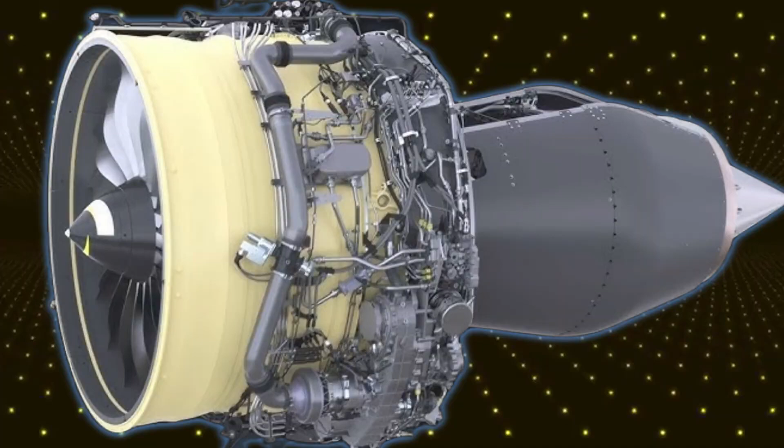Fast forward to 2024, and the MC-21-310, powered by the PD-14, is now poised to enter commercial service. This engine, symbolizing years of engineering, national ambition, and a commitment to technological independence, now stands ready to redefine Russian aviation in the global market.

The late 2000s were a transformative time for Russian civil aviation, with the launch of the SSJ-100 signaling a revival. Yet, this wasn't enough. The ultimate goal was the MC-21, a modern, medium-haul jet designed to break into the market dominated by Western giants like the Boeing 737 and Airbus A320. This would require more than just innovative design and passenger comfort. The MC-21 needed a competitive engine to be viable globally.

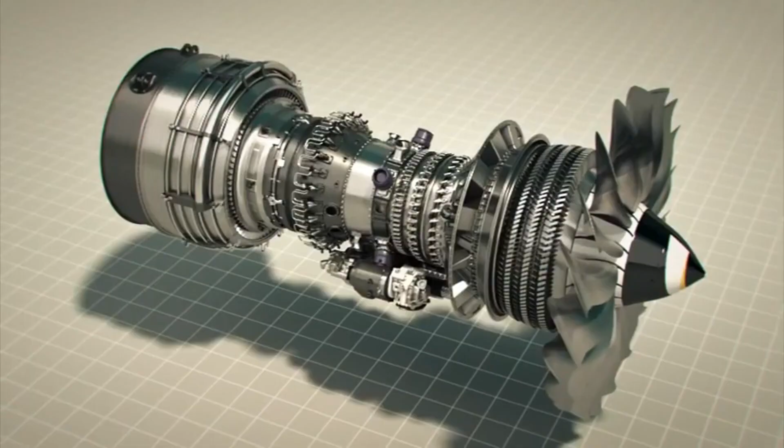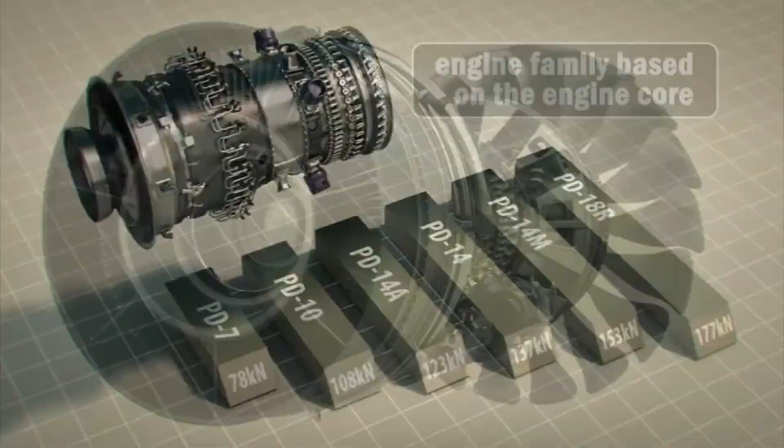While initially it seemed more straightforward to rely on foreign engines, geopolitical realities and a push for autonomy led to the decision to develop a domestic option. The United Engine Corporation took on this challenge, setting a goal to build an engine that wasn't merely functional, but competitive, efficient, and symbolic of Russia's engineering capabilities. The result would be the PD-14, an engine not only tailored to the MC-21, but one that could lead to a new family of engines, signaling Russia's commitment to self-reliance and technological prowess.

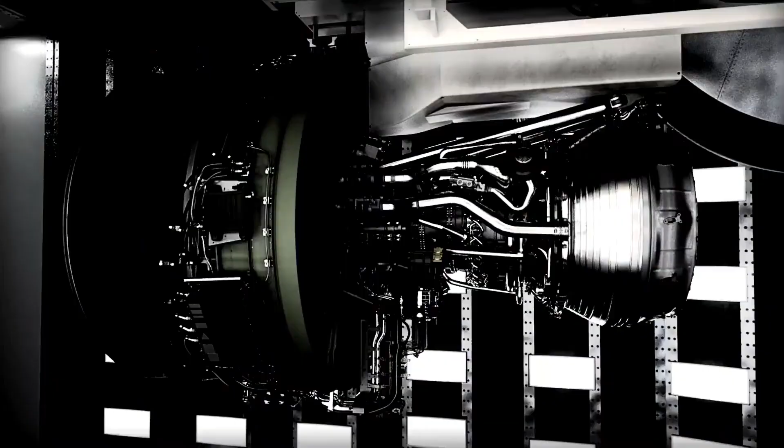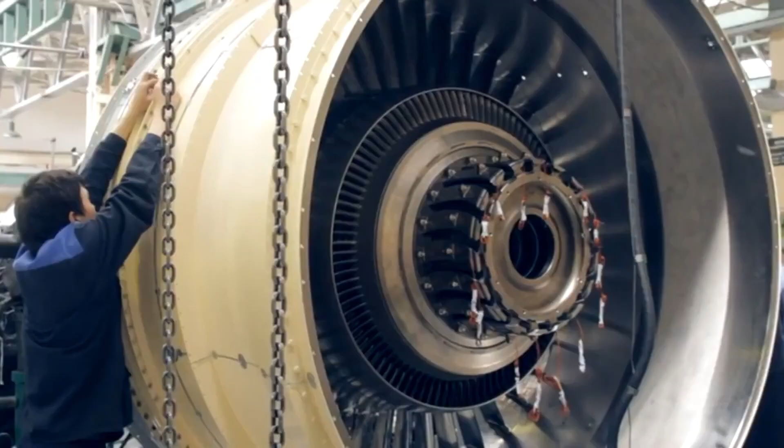Creating the PD-14 meant standing up against engines honed over decades by global leaders. Companies like Rolls-Royce, Pratt & Whitney, and General Electric had spent decades fine-tuning technologies and advancing materials science, resulting in some of the most sophisticated engines in history. Russian engineers viewed this challenge as an opportunity to leapfrog with a fresh perspective. Their goal was to build something dependable, innovative, and robust, without risking untested technologies.

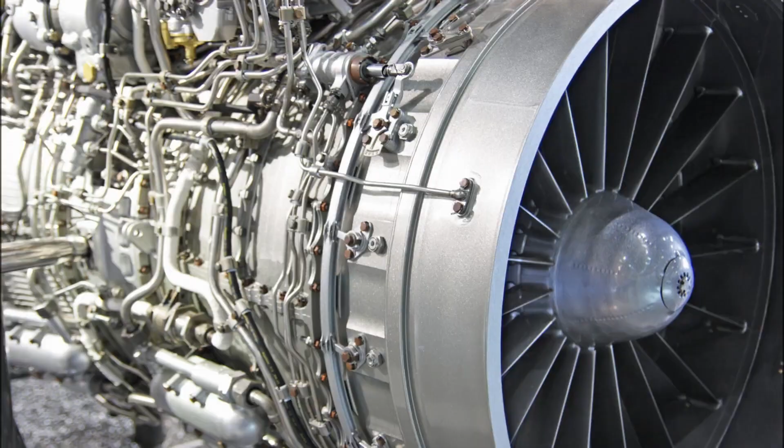They decided to draw on a mix of established methods and cutting-edge solutions in areas such as materials and aerodynamics. Through strategic decisions, the engineers balanced the PD-14's complexity with reliability, opting for materials that would ensure durability even as the engine reached high-performance metrics. Russia's aviation engineers were acutely aware that this wasn't just about producing an engine. It was about staking their claim in a market long dominated by a few key players.

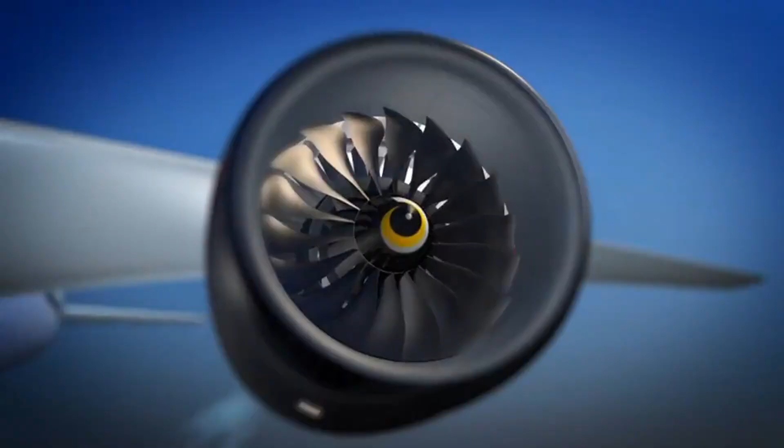Building the PD-14 required more than technical know-how. It demanded a sweeping modernization of Russia's aviation industry. Facilities that had long relied on older, less efficient methods were suddenly tasked with producing advanced components. To meet the demands, an overhaul began across multiple sectors, not only in terms of machinery, but also workforce. Skilled workers underwent extensive training, learning to handle the complexities of producing high-tech engine parts.

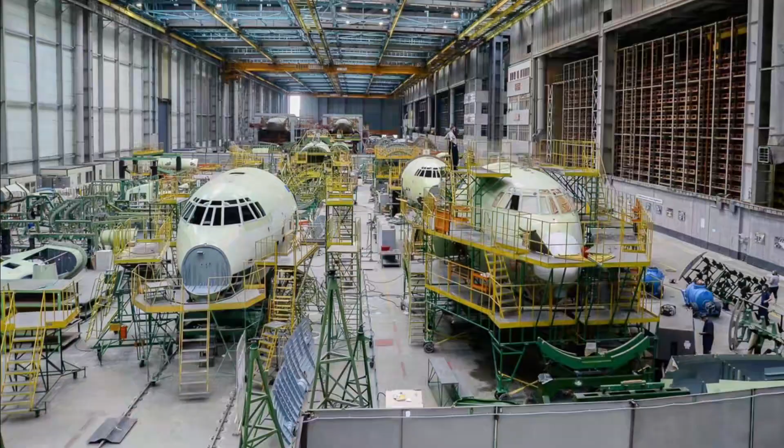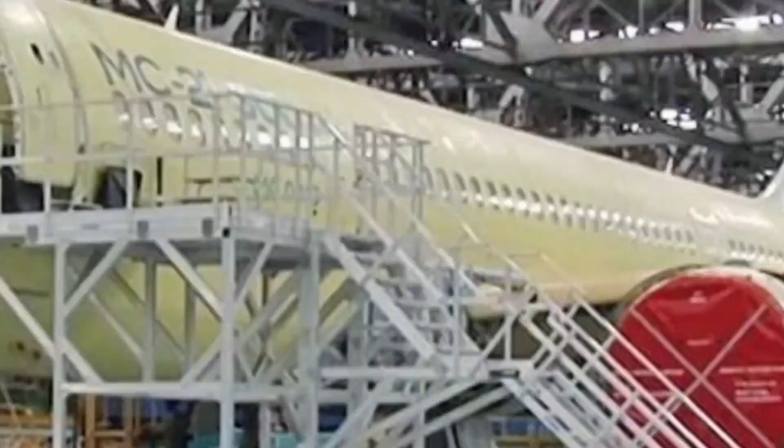The UEC Aviadvigatel, the hub of this initiative, collaborated with Russian universities, aerospace research centers, and large-scale manufacturing facilities to ensure that every aspect of production met international standards. This collaboration created a feedback loop where innovation at one site supported advancements elsewhere, forging an interconnected, efficient ecosystem. By the end of this transformation, Russia's aviation manufacturing had not only caught up, but was now prepared to lead, with facilities capable of supporting current and future generations of engines.

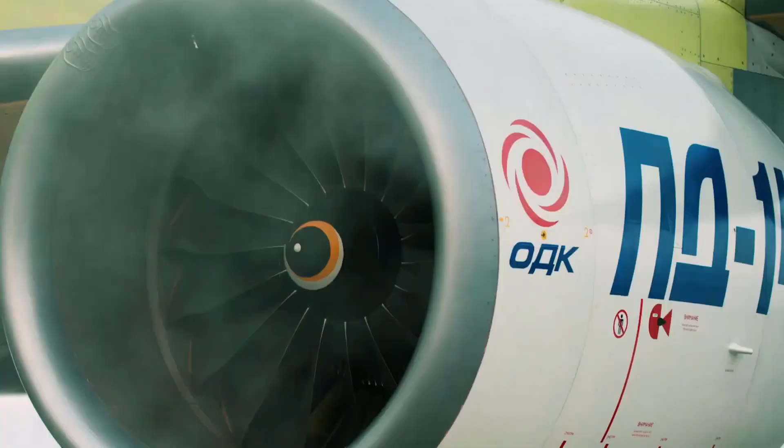With the prototypes ready, the PD-14 embarked on a series of rigorous tests to prove its capabilities. This wasn't a simple process. Ground tests began in 2012, examining every aspect of the engine's structure and resilience. Over time, additional prototypes were constructed, each representing an iteration of improvements based on prior tests. In 2015, the PD-14 made its first test flight under the wing of an IL-76 aircraft, a significant milestone in its journey. This stage involved subjecting the engine to varied flight conditions, ensuring it could handle everything from cold temperatures to high altitudes and rapid power shifts.

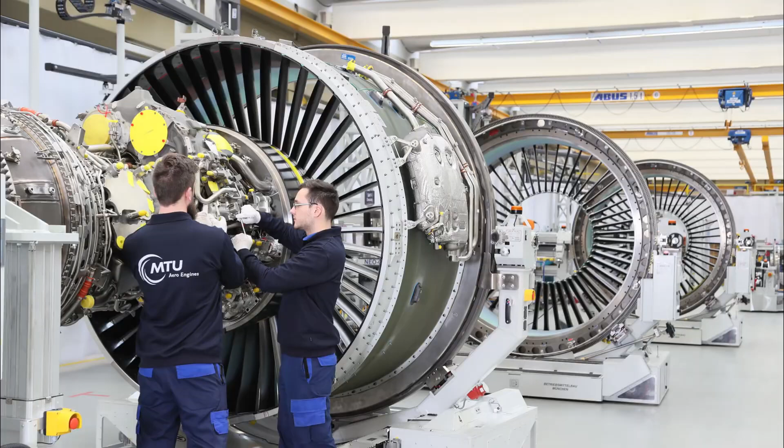Over 3 years of testing, adjustments were made to refine the engine's performance, ultimately culminating in its certification by Russian authorities in 2018. Yet, this certification marked the beginning, not the end. The engine continued to undergo further validation to meet international standards. By 2021, the PD-14 was ready for its public debut at the Dubai Air Show, symbolizing a new era of competitive Russian engineering on the world stage.

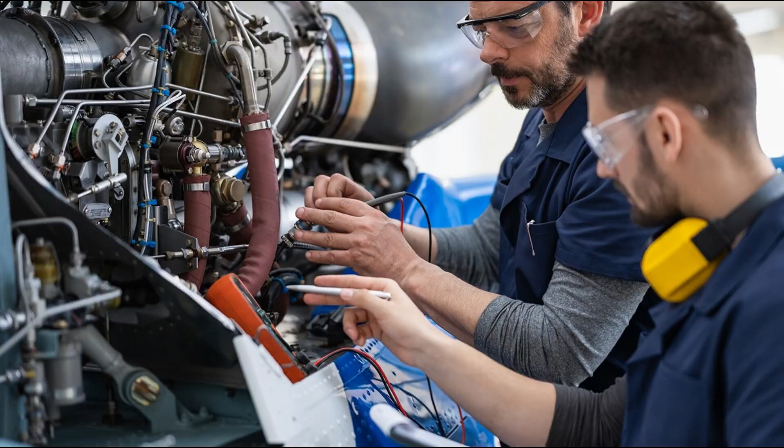One of the most grueling tests for the PD-14 was exposure to volcanic ash, a simulation meant to protect engines from events like the 2010 Icelandic eruption that grounded flights across Europe. While volcanic eruptions are rare, the ash particles are hazardous to jet engines, leading to significant wear and potential failure if inhaled during flight. Russian engineers recognized this risk and decided to put the PD-14 through an ash endurance test, using real volcanic ash sourced from the Kamchatka region.

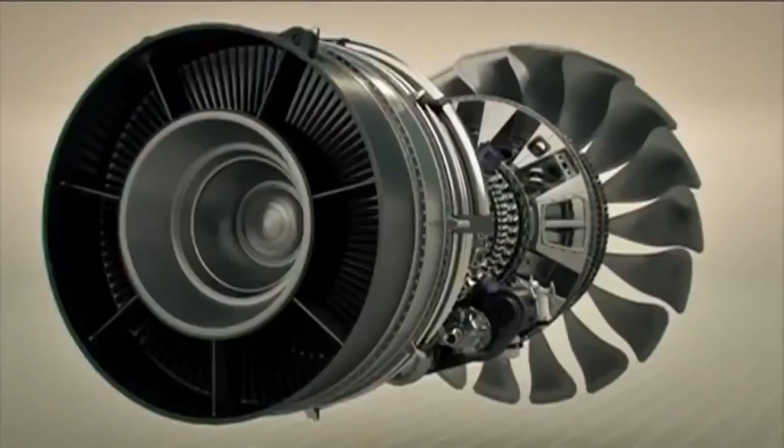This wasn't merely about surviving the ash clouds, but ensuring continued performance and reliability in such conditions. The tests exposed the engine to dense ash at high speeds, simulating conditions an aircraft might encounter. By enduring this trial, the PD-14 demonstrated its resilience and durability, standing out among engines that rarely face such harsh testing. These preparations place the PD-14 ahead of its class in durability, making it one of the most resilient engines ready for both everyday and extreme conditions.

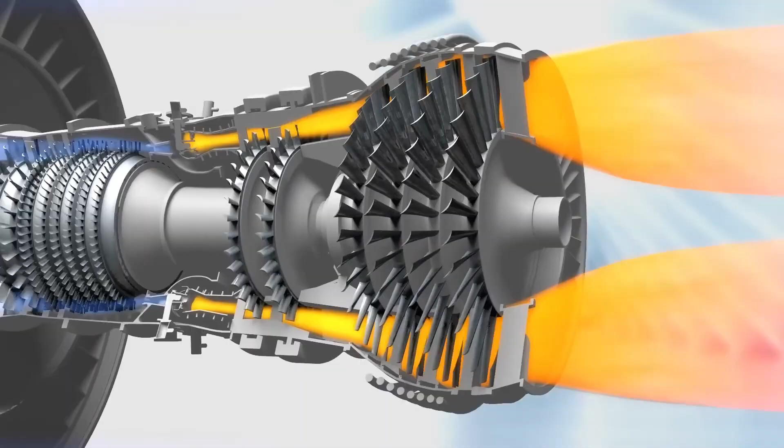The PD-14's core design embodies a balance of efficiency, power, and durability. This fifth-generation dual-bypass turbojet engine uses two distinct air circuits to generate thrust: the core circuit, where air is compressed, ignited, and expelled, and the bypass, which sends air through a large fan to maximize thrust. Within the core, 11 compression stages raise the air pressure nearly 40 times, transforming a steady airflow into a powerful stream. This compressed air, now heated by the combustion process, reaches temperatures nearing 2,000 degrees Celsius, requiring advanced engineering to avoid overheating. Special ceramic coatings and meticulously designed cooling channels protect internal components, ensuring durability under high-stress, high-heat conditions.

The PD-14's robust design allows it to maintain a steady balance between power output and energy consumption, delivering reliable performance without sacrificing longevity. Each component, from the compressor to the turbine, is carefully crafted to withstand the rigorous demands of modern flight, underscoring the PD-14's role as a high-performance yet sustainable engine.

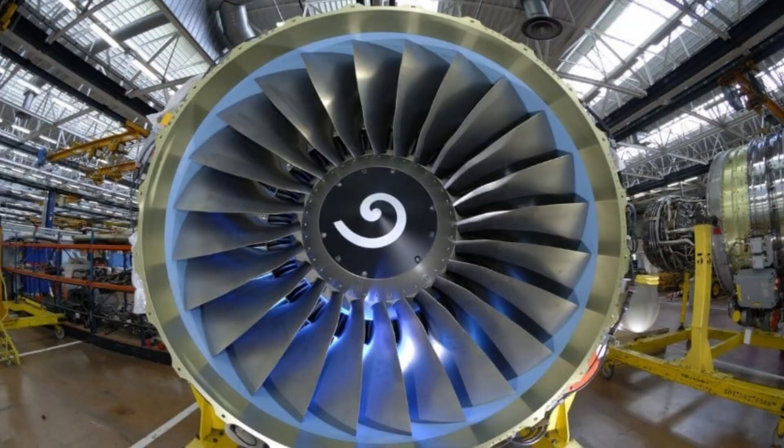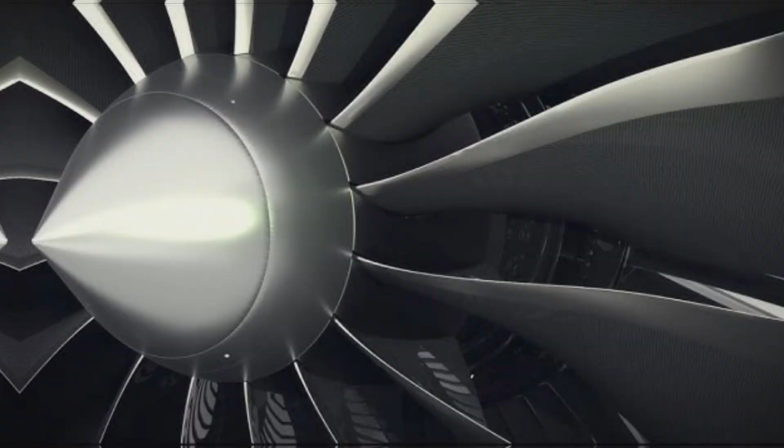The fan, a signature feature of the PD-14, is crafted from hollow titanium blades, a choice that combines strength with weight reduction, making the engine more efficient without sacrificing durability. Competing engines often utilize composite materials, but Russia's titanium blades offer a cost-effective, reliable alternative. These hollow titanium blades create a unique balance, adding enough thrust through the bypass to make the engine competitive in fuel efficiency without the high production costs associated with composites.

The fan's design, paired with the PD-14's bypass ratio of 8.5:1, optimizes airflow, enhancing both thrust and fuel economy. This bypass ratio means that more air flows around the engine core than through it, creating a quieter, more fuel-efficient flight. Russian engineers saw this as an optimal compromise, allowing the PD-14 to deliver consistent performance while keeping costs manageable. This approach showcases a commitment to not just performance, but also operational economy, ensuring that the PD-14 is both a powerful and financially viable choice.

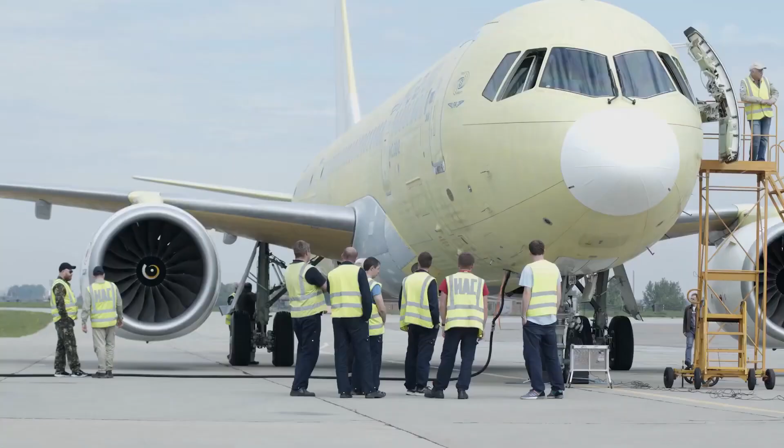Environmental responsibility was a driving factor in the PD-14's development. Traditional Russian engines were powerful but fuel-intensive, yet the PD-14 manages to improve on these foundations. It offers a 12 to 16% boost in fuel efficiency compared to its predecessors, translating to fewer emissions and cost savings for operators. With emissions reduced by approximately 30%, the PD-14 supports global aviation's push towards sustainability, meeting or exceeding modern regulatory standards. This efficiency is partially due to its bypass design, which ensures consistent performance across various flight speeds.

While environmental factors played a critical role, the PD-14 also excels in traditional performance metrics, balancing fuel economy with power output. This environmentally friendly design makes it a forward-thinking engine, well-suited to meet the aviation industry's shifting standards. As airlines face increased pressure to reduce carbon footprints, the PD-14 offers a valuable solution that combines environmental responsibility with operational effectiveness.

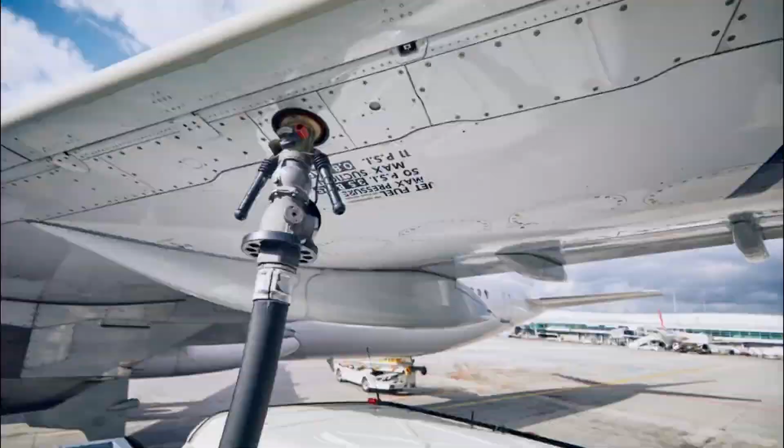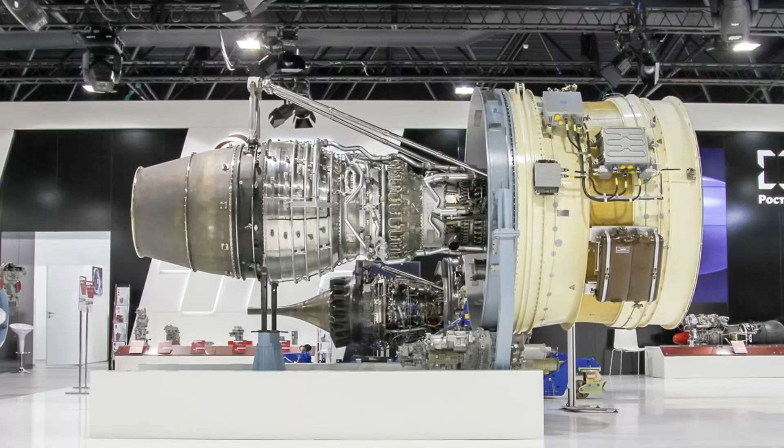The PD-14 incorporates a sophisticated web of electronics, handling fuel regulation, temperature management, and airflow adjustment in real time. Unlike older engines that depended on hydraulics, the PD-14's operations are largely automated, overseen by electronic systems designed by UEC Star. This evolution significantly reduces mechanical wear, improving reliability while decreasing maintenance needs.

By centralizing control into an advanced electronic brain, the PD-14 adapts quickly to shifts in flight conditions, automatically fine-tuning performance to match the demands of each phase of flight. Additionally, these electronics monitor engine health, alerting maintenance crews of any issues before they escalate.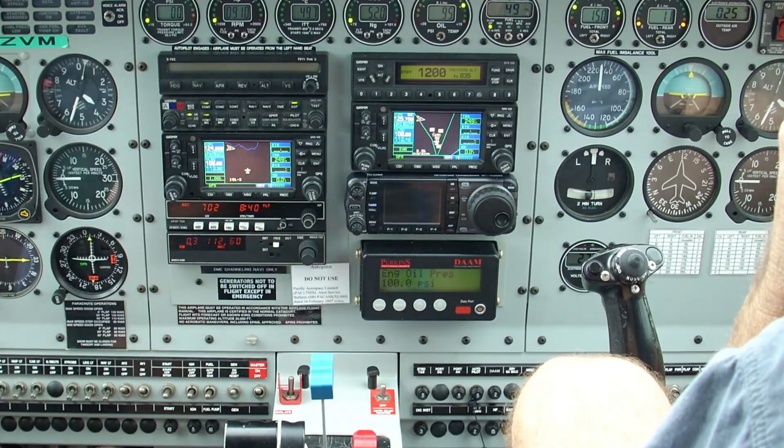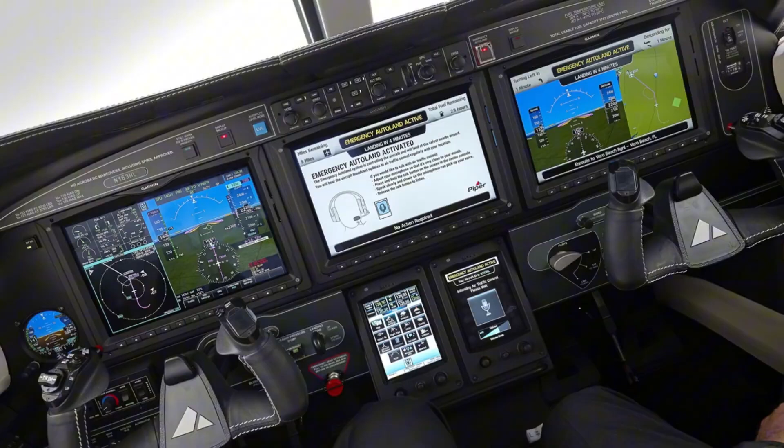This integration of smart controls makes the PD-14 a highly responsive engine, capable of managing various parameters with precision. The streamlined automation not only boosts efficiency, but provides peace of mind for operators who benefit from increased reliability and fewer unexpected repairs, ensuring smooth, cost-effective, and reliable service.

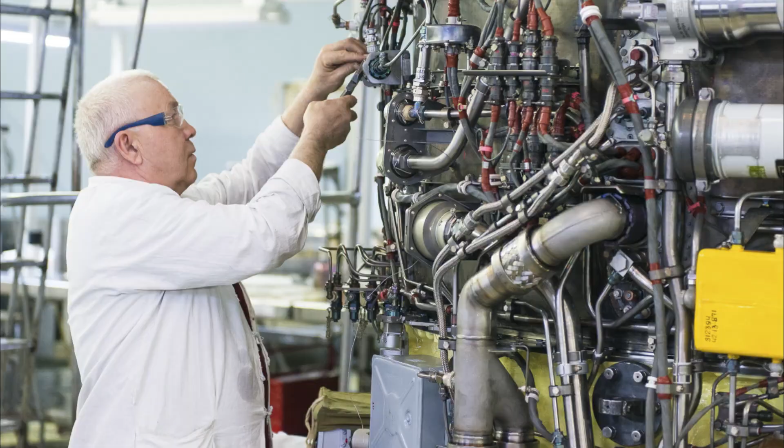Understanding that engine support is just as crucial as design, United Engine Corporation began creating a comprehensive maintenance network well before the PD-14 was widely deployed. From repair facilities and spare part logistics to dedicated training centers, UEC ensured a robust support system to keep the PD-14 in peak condition throughout its service life.

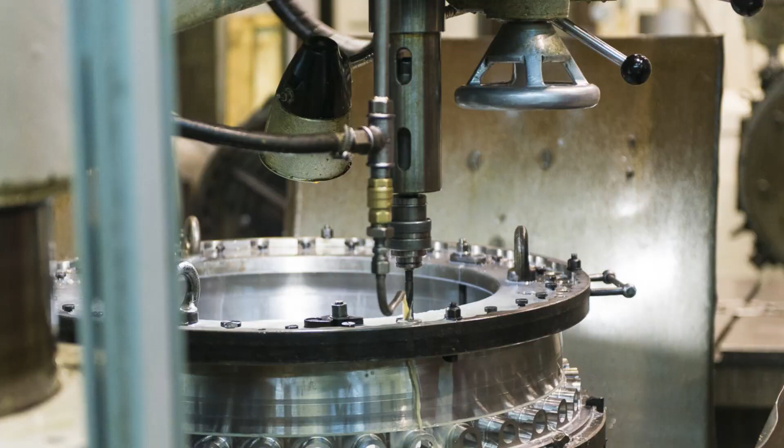Strategic centers were established across Russia and in international markets, making it easy to access parts and technical expertise wherever the engine is in use. This infrastructure means that operators can rely on rapid turnaround for repairs, minimal downtime, and consistent maintenance quality.

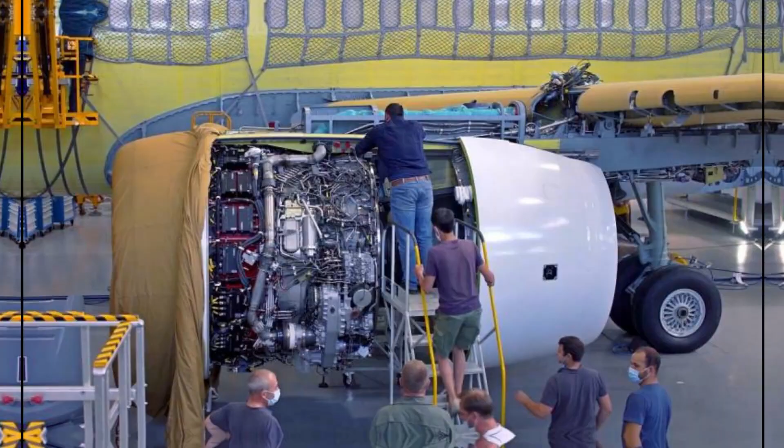UEC's commitment to post-sales support ensures that the PD-14 is not only well-built but well-maintained, securing its long-term reliability and appeal. This extensive network allows Russian aviation to step confidently onto the world stage, promising both high-quality performance and unmatched support, ensuring the PD-14's success as a reliable option for airlines around the globe.

The PD-14 is more than a standalone engine. It's the first in a family of engines designed to support a range of aircraft. Based on the PD-14's technology, Russian engineers are developing the PD-8 for regional jets and the powerful PD-35 for wide-body airliners, expanding Russia's capacity to produce engines across different aircraft classes.

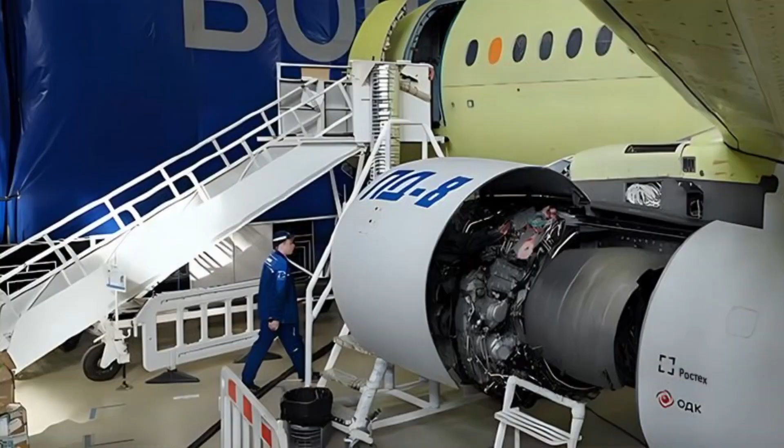Each engine within the PD family leverages lessons learned from the PD-14, creating a cohesive lineup that combines performance with efficiency. The PD-8, for example, will power the SSJ-100, a regional jet vital for Russia's domestic air network, while the PD-35, a larger high-thrust engine, is aimed at long-haul international flights.

These engines symbolize Russia's commitment to reduce dependency on foreign technology, fostering an aviation ecosystem that can serve both the local market and international carriers. The PD family is expected to be a major component of Russian aviation's future, providing engines tailored for all types of aircraft needs.

Long-term reliability is essential for any engine, and the PD-14's design emphasizes both durability and operational cost efficiency. By using domestically sourced materials and well-tested components, Russia ensures that the PD-14 remains unaffected by external market fluctuations, keeping production costs stable and predictable.

Airlines benefit from lower costs over the engine's life cycle, as the PD-14 requires less frequent maintenance than comparable engines, and has fewer points of failure due to its streamlined design. This results in reduced downtime and lower replacement part needs, making it a cost-effective solution for airlines.

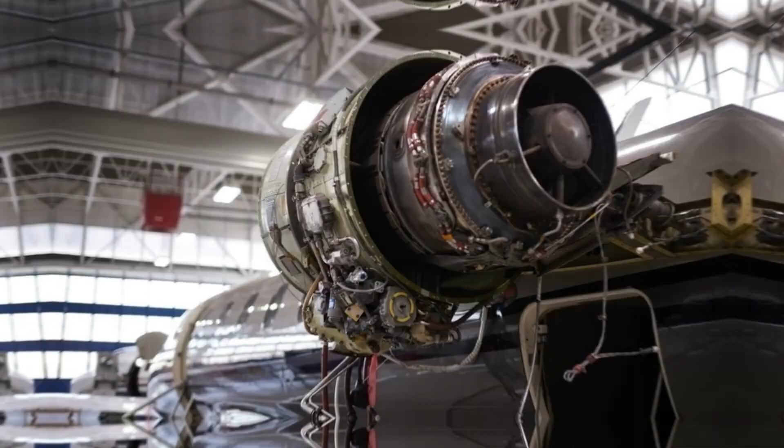The PD-14's self-sufficiency in terms of parts and production not only cuts costs, but enhances fleet resilience, ensuring consistent operations even in a fluctuating global market. Operators who invest in the PD-14 gain a reliable and financially practical choice, a critical advantage in an industry where maintenance costs and fuel efficiency determine profitability.

Since its launch, the PD-14 has shown strong demand, prompting Russia to ramp up production significantly. Assembly lines and manufacturing plants across Russia were modernized to handle increased output, with the MC-21 airliner production also scaling up. This alignment in production capacities ensures a steady supply for both engines and aircraft, supporting Russia's aim to become a formidable competitor in the global aviation industry.

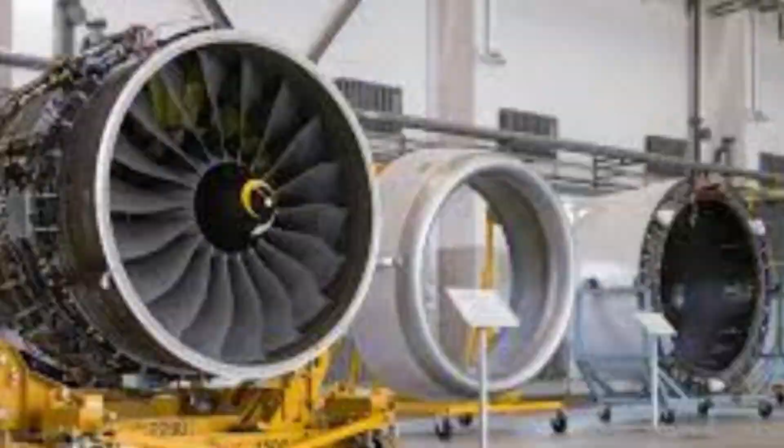With the PD-14's success, the focus is shifting toward increasing production of upcoming engines like the PD-8 and PD-35, broadening the scope of Russian-made aviation solutions. Russia's commitment to scaling production reflects a long-term strategy to fulfill domestic and international demands while solidifying its footprint in the aviation market. Each new engine strengthens Russia's position, ensuring a consistent supply chain and robust production framework that will support the nation's aviation ambitions well into the future.

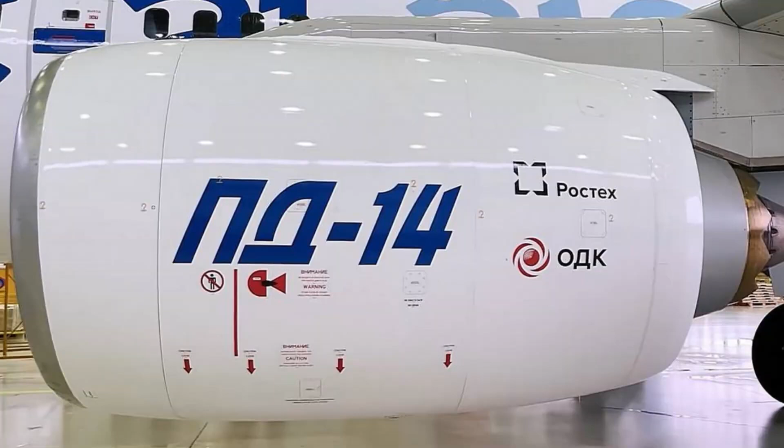The PD-14 represents more than an engine. It's a milestone in Russian technological independence and a commitment to innovation. With advanced engineering, robust environmental credentials, and a comprehensive support system, the PD-14 is not just powering planes, it's propelling Russian aviation forward.

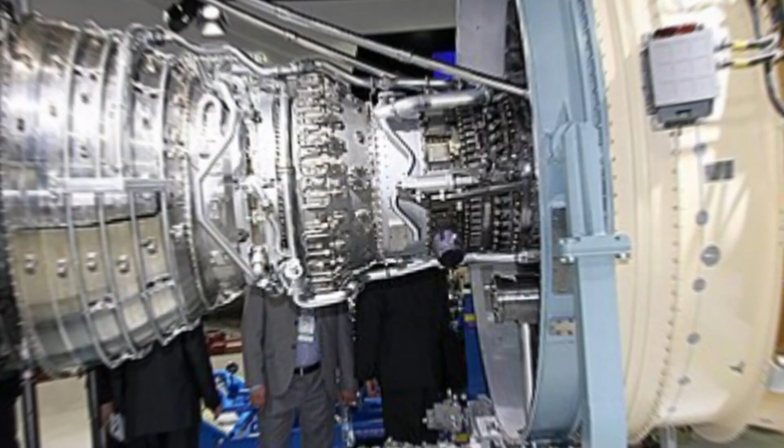As production expands, the PD family will ensure Russia has a reliable, homegrown option for its airliners, marking a new era in aviation that embraces efficiency, resilience, and global competitiveness. This engine's journey is only beginning, but it's already a powerful symbol of Russia's commitment to the skies.